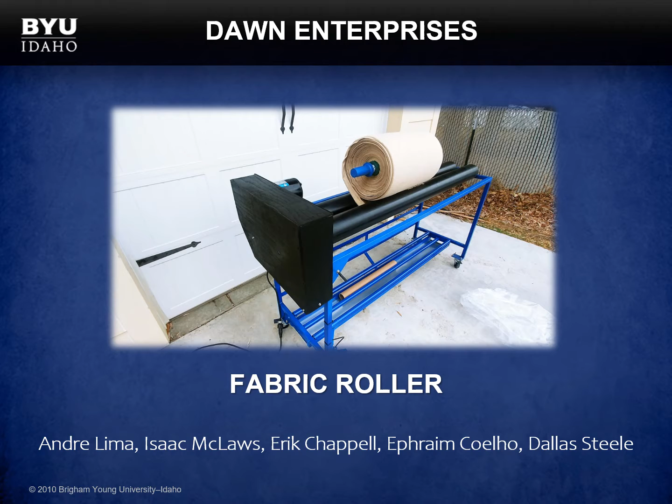For our 480 project, we chose to do a fabric roller system for Dawn Enterprises. This is Andre's, Isaac's, Erik's, Ephraim's, and Dallas Steele's 480 project.

Background: Dawn Enterprises manufactures a lot of products for the military, and they assist people with disabilities to give them a work ethic.

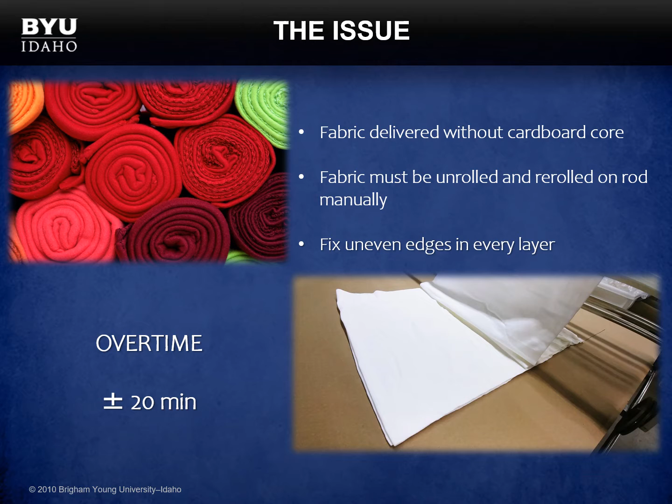The problem is, when they get material, it's not always rolled right. They don't have a cardboard tube in the middle, which means they have to unroll it by hand on the table, put a cardboard tube in it, and then re-roll it back up, and that takes about 20 minutes.

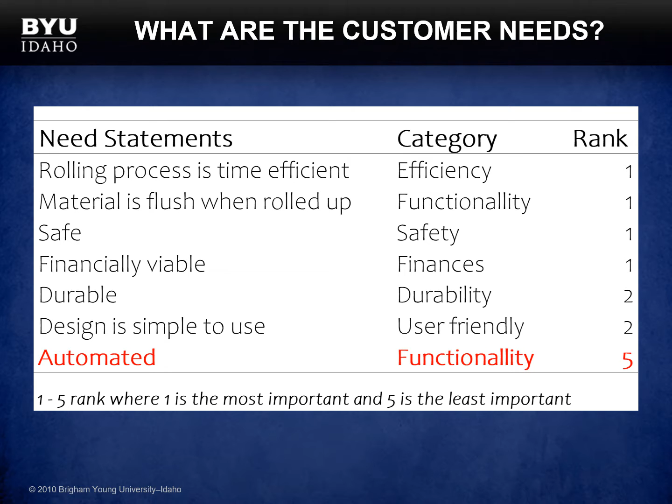So the customer's needs are: it needs to be efficient, functional, safe, cheap, durable, and user-friendly. They did ask for it to be automated, however that lied outside the budget.

For the engineering specs, we wanted to get it down to 10 minutes to unroll and re-roll, with 1/8 of an inch of tolerance. That was our goal. It should be safe, with no injury, and we wanted to chop the number of steps down to 3.

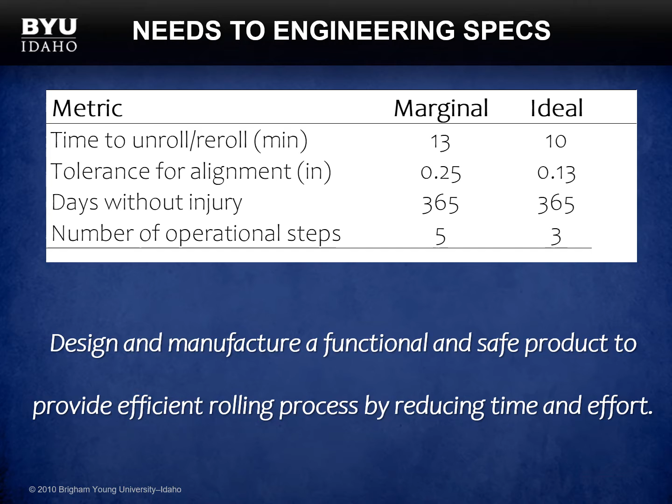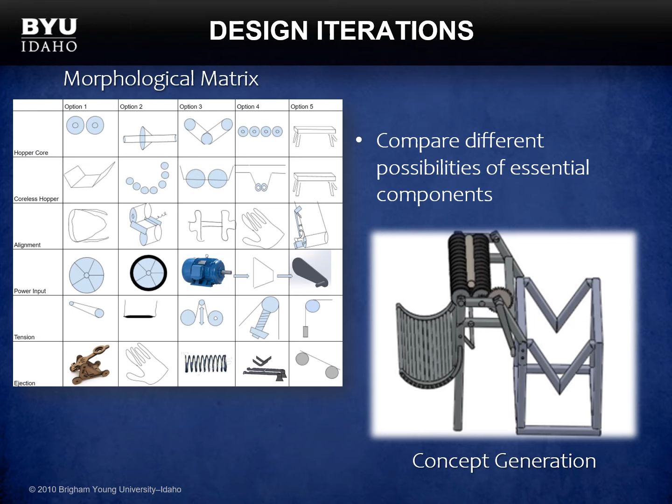For design iterations, we chose a morphological matrix and chose different things and drew them all up. We did a modified Pugh chart to be able to weigh these, and we came up with this design idea.

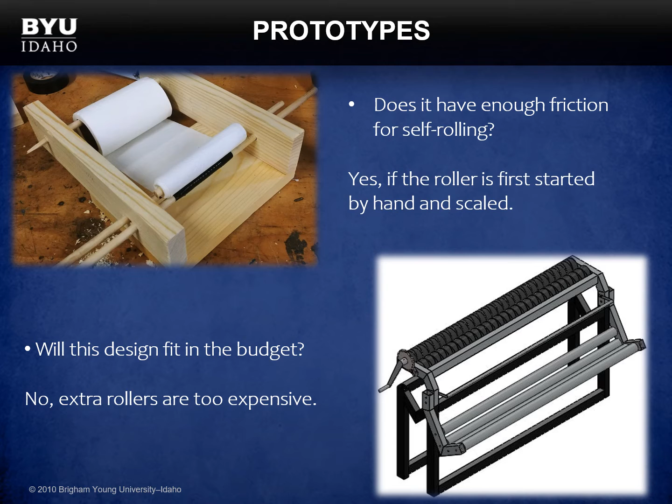However, in this design idea, after building the prototype and learning that yes, the upper rollers would work, the cost to manufacture that length of lower rollers and upper rollers was too much, so we decided to shorten the design.

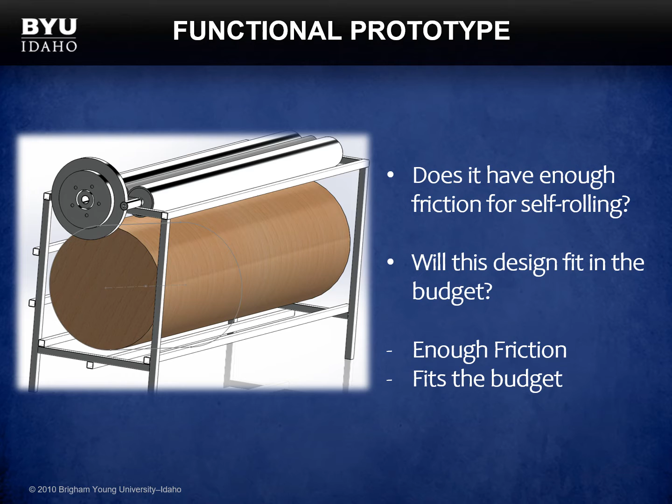In shortening the design, we made it a standalone unit, and we wanted to see how well this works. So we spec'd it all out, and yes, it fits inside the budget.

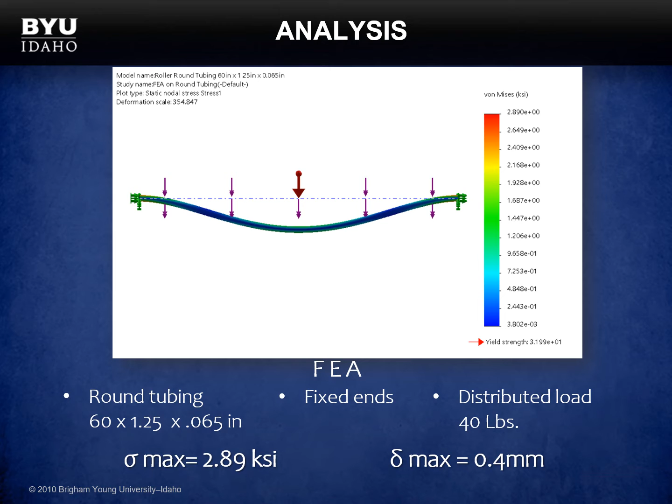We did an FEA analysis of the upper rollers because they're going to hold most of the weight. That weight was about 40 pounds, so we modeled it, and it was way stronger than the 40 pounds. So everything was working out great.

For initial testing, we built the product and took it down to Dawn Enterprises. While we were testing, they changed a few of the key numbers we were looking at with building it.

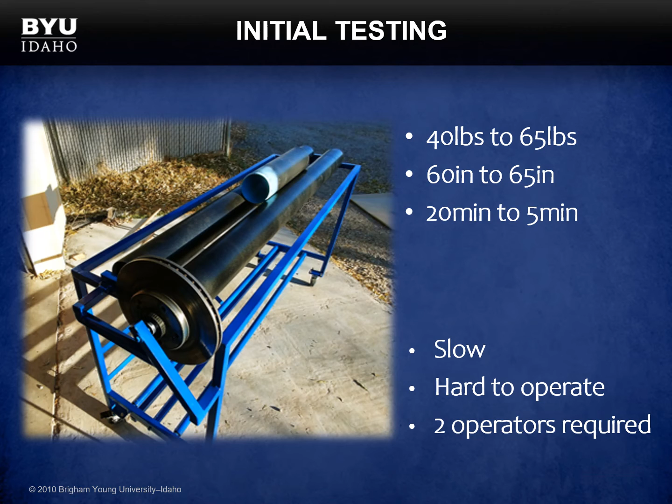For example, the 40-pound max weight changed to 65 pounds. They changed the max width from 60 inches to 65 inches. And they changed the roll-up time from 20 minutes to less than 5, because they were unhappy with our 6-minute roll-up time. Basically, after the initial testing, it was slow and hard to use, and it took 2 people to operate it.

So we changed the design by adding a motor, a belt and pulley system, a belt guard, and a foot pedal brake.

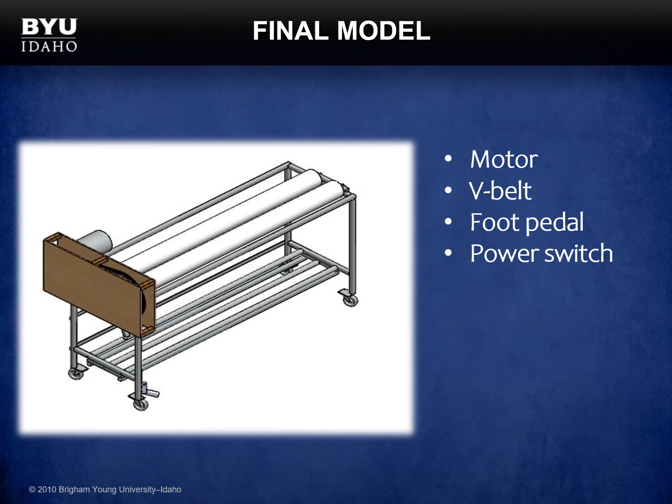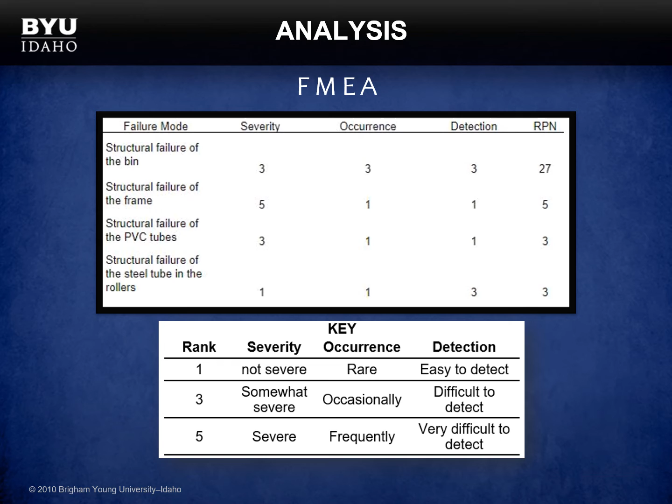The analysis we did with the FMEA basically showed us that we didn't want it to fail at the bin where you put the fabric in the first place, so we strengthened that up quite a bit by adding a third roller.

This is the assembly model of everything, with the upper roller assembly, the motor, the belt guard, and the frame itself, along with the foot pedal.

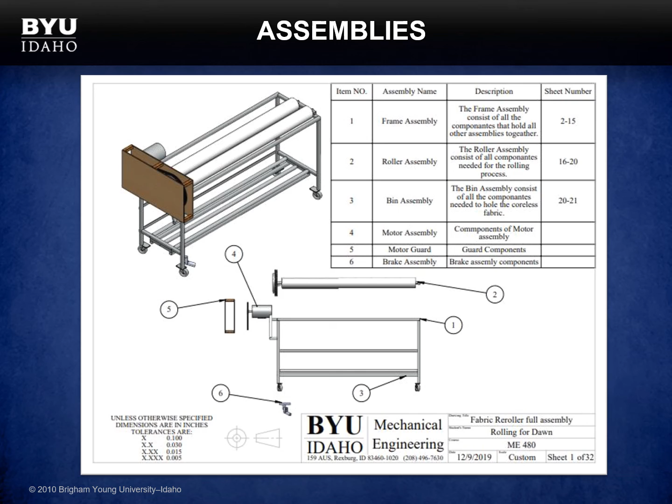This is soft tissue testing, just taking foam and trying to shove it in there. And then we took it up to their facility and tested it there as well.

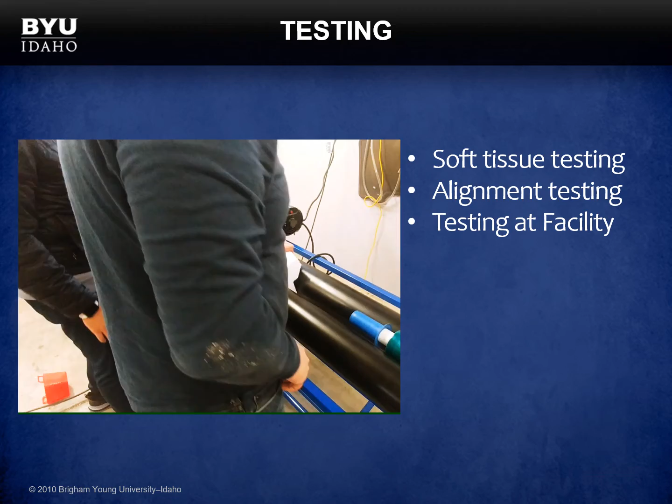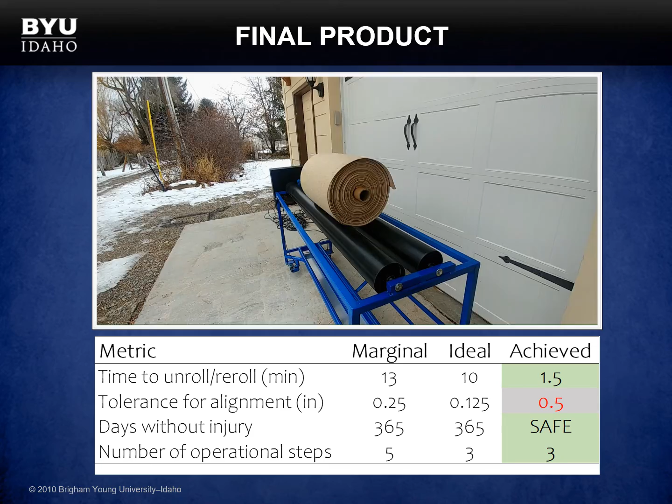When we delivered, this is a quick time-lapse video of it working. Basically, time to unroll was cut down to 1.5 minutes. Tolerance for alignment was 1/2 inch, which was more than what we wanted, but they were very happy with that. It's safe to use, and it chops down the number of steps by 2.

Financially, there were a lot of things on this product that were donated or found on discount. So we ended up saving them quite a bit of money, and we kept within our budget of $300.